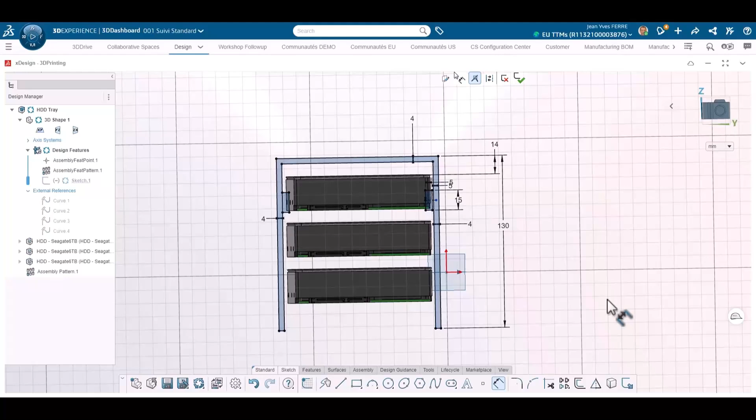In the last episode, we finished the structural parts of the case, and in this episode, we will focus on the most important element of a large storage unit, hard drives. Hard drives need to stay in place securely, but I need to be able to remove them easily in case there is a problem, so I will build a box with drawers for them. Let's start with a layout sketch to represent the size of parts I need in one single location. I don't spend time here creating this sketch. You are familiar with these simple operations now.

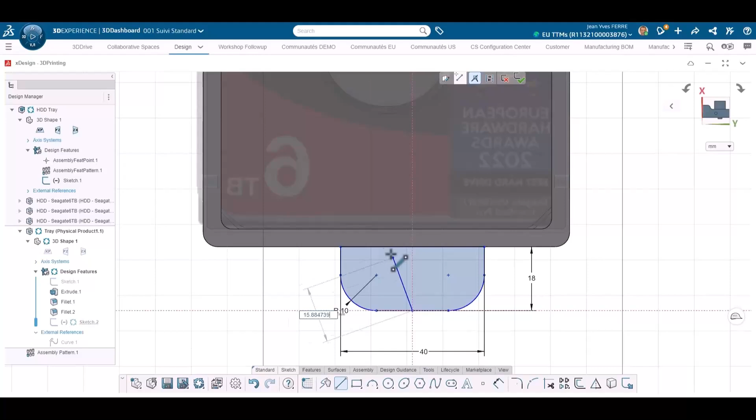So I start with a disk drawer I create with an open contour extrusion, also called a thin extrude. Once dimensions and fillets are placed, I add a small pull tab on the drawer. It will be used to remove hard drives when needed. Again, I add some fillets and dimensions and see how I center the tab. I use a reference line with extremities on the middle of each reference, and force the line vertical to center the sketch. As you may know if you have watched some of my previous videos, I prefer reducing dimension use when I can. Sketch relations are more robust.

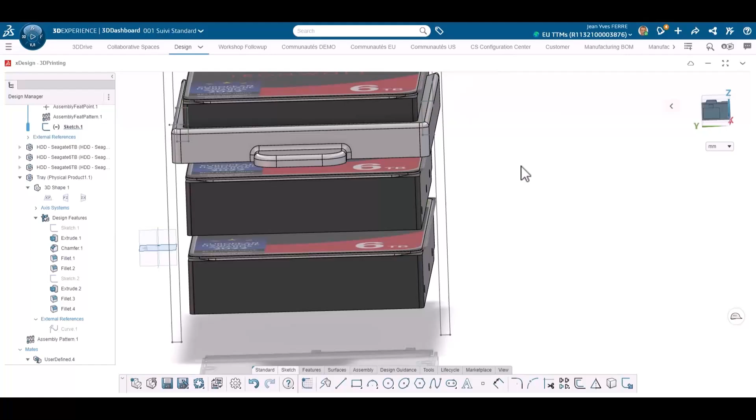I continue with some more fillets and I add some chamfers on extremities to add some flexibility when inserting drawers. I add positioning with a couple of mates. Plane on plane for bottom and side and a dimension for front mate. I need to add a fastening solution between drawer and hard drive. I choose a solution of interlocking studs, and to do that, I project hard drive holes into my sketch and create studs from them.

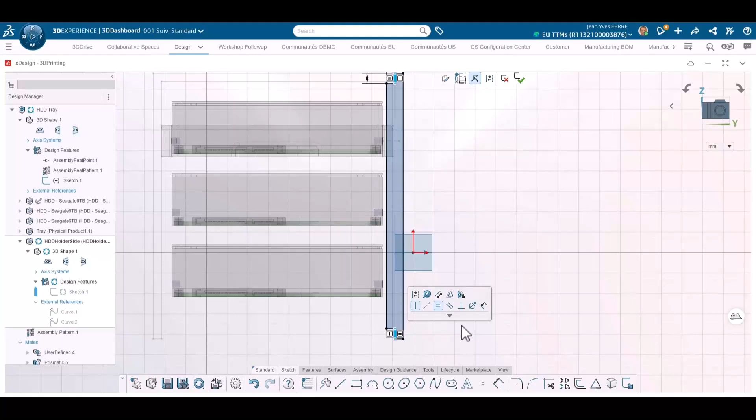Then I create a structure to hold drawers, and for that I leverage the layout sketch I created earlier. I incorporate a lip and groove design to hold the parts together, and I don't forget to add a mate to fix the part. Remember, external references are not enough to position a part. I continue with some cuts where drawers will slide. I choose a clearance of 0.2 millimeters, so drawers will move freely but with a stop at the back.

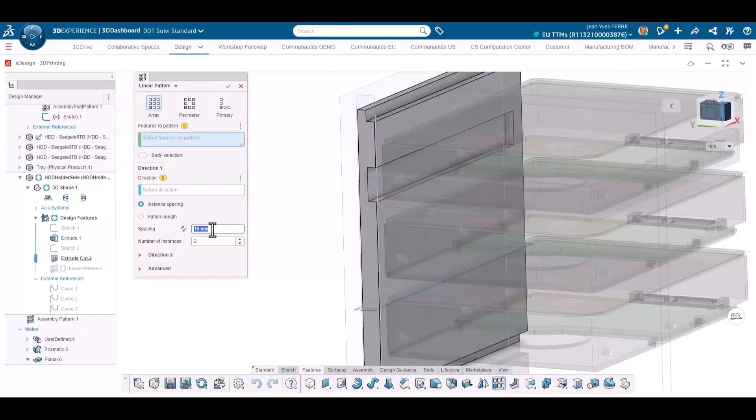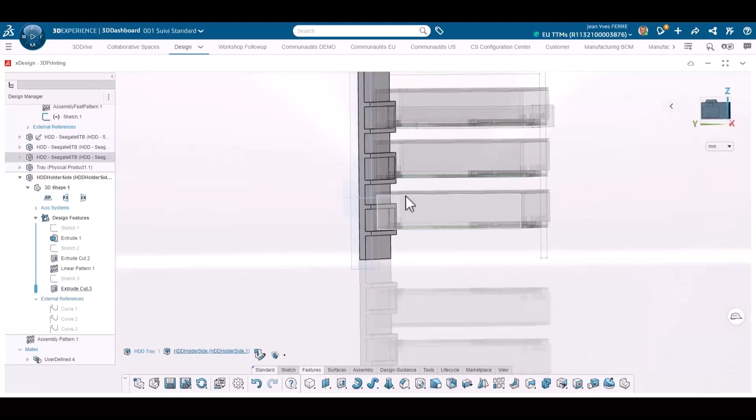Of course, I need this shape for other drawers, so I use a linear pattern with the same spacing as hard drives. At that point, I realize my side part is too thick, and I want hard drives to be cooled by fans, so I remove some more material and make them breathe. For that, I just add some simple sketches and extrude through all. I now add some tabs to secure structural parts together. There will be holes on one side and nut traps on the other side to simplify the assembly phase.

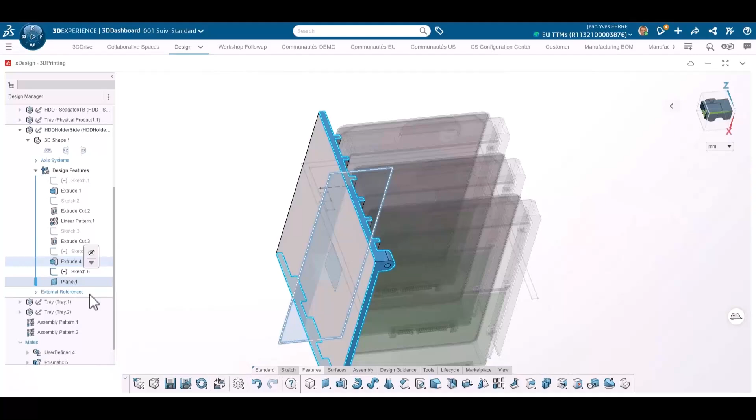Once I have created one tab, I just mirror entities and use the full sketch for extrusion. This saves time. And because I want to save even more time, I mirror both tabs on the other side. Then I would like to add some air vents, so I create some hexagonal holes and I pattern them along a line. To copy them across the part, I pattern this last pattern in two directions, upwards and downwards. I also fill holes that are too close to the tabs so the part remains strong.

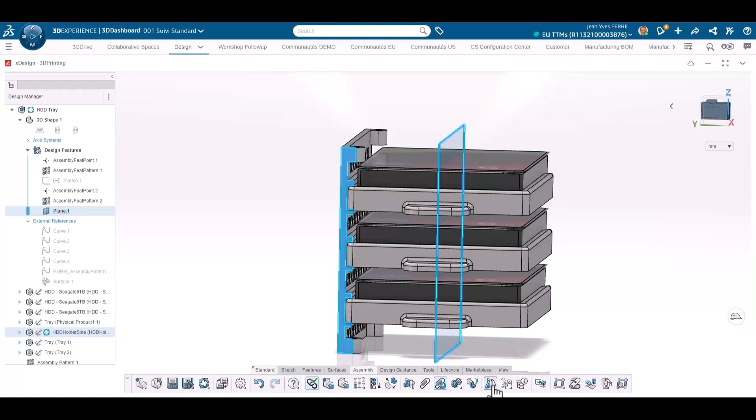Now it's time to mirror the part, very easy with assembly mirror. So I can now create the top part that will hold the side parts. For that I build a plate and project tabs to create some recesses with an offset. That way the parts will fit together.

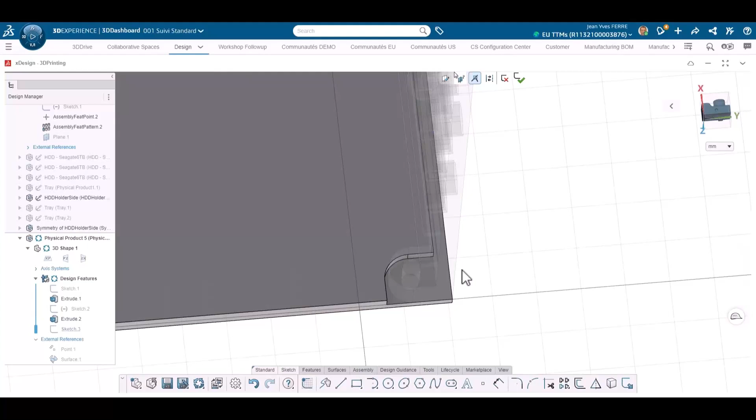Now I create through holes based on the tabs, so I'm sure holes will be aligned. Once I have added chamfers for countersunk bolts, I create an air vent on top part. For that I create new hexagonal holes and I take note of dimensions for the pattern.

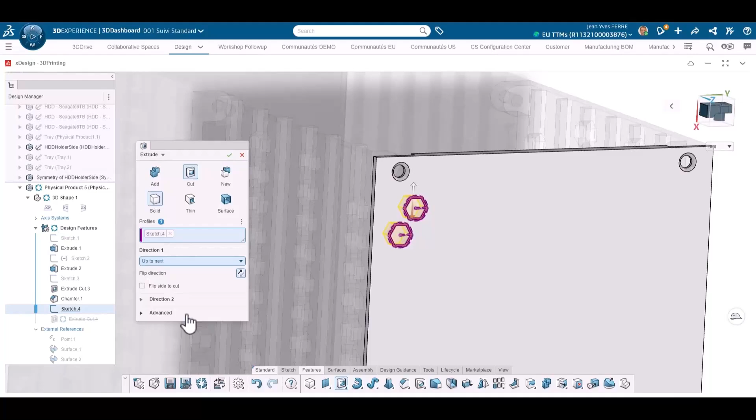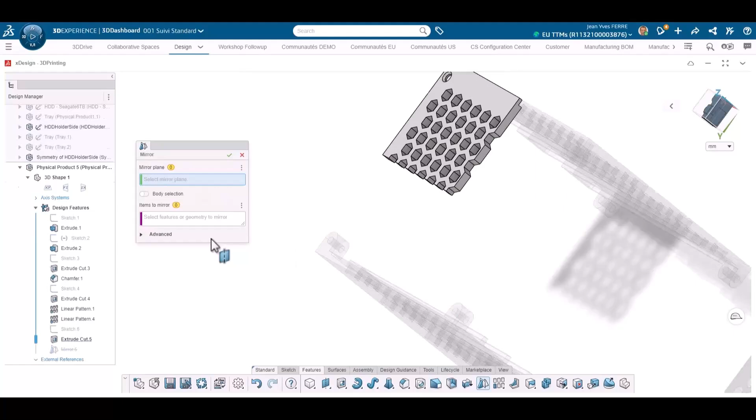Finally, I leverage symmetry of the part in both directions to create the full air vent. That's the reason why I limited the pattern to the quarter of the part. See how I create this pattern of pattern? Then I cut the part by middle planes and recreate the full part with two mirror features. With this solution, these air vents are achieved very easily.

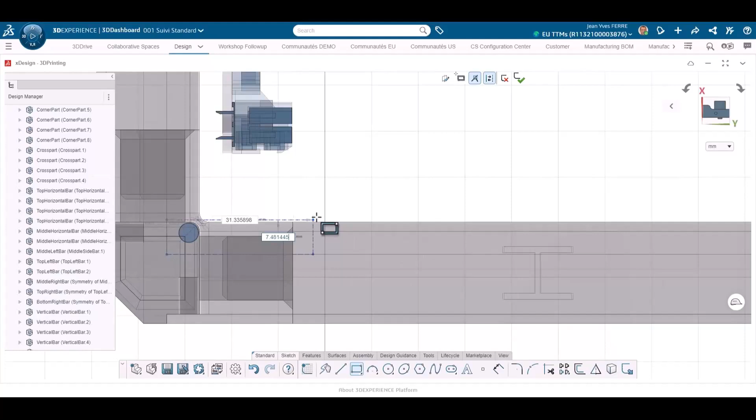Now let's create bottom plates that will support hard drives. I will create a sub-assembly that will contain both bottom plates, so it will behave like only one part in the assembly. I start with hole position, again to make sure holes are aligned, and I create the overall shape based on existing structure.

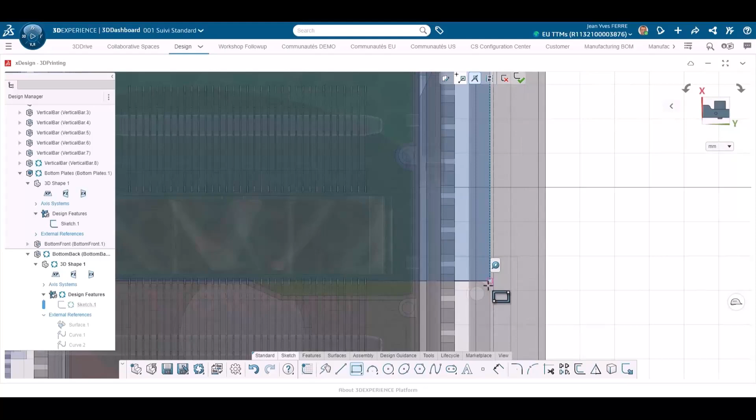Then I create both plates with simple geometry, a box of 2 mm thickness, that's maybe not enough, and of course holes for bolting plates. As always, I add some fillets in the corners, and some chamfers on holes for countersunk bolts.

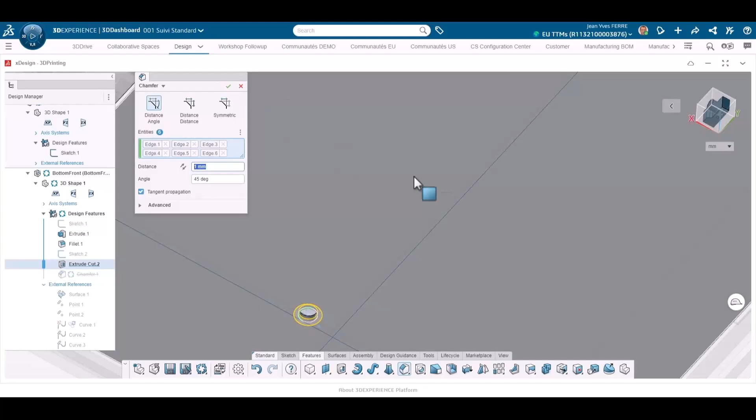I also project holes I will use to attach the drawer structure to the bottom panels. I change feature order so drawer structure holes are done before chamfer. This way I use only one chamfer feature, so only one parameter.

This is when I realize I forgot to design nut pockets in the side parts. So I create a hexagon with a blind hole and leverage symmetry to mirror sketch and reuse the mirror feature I used for tabs. So if there is any change, I will have only a few features to modify and the rest will rebuild nicely.

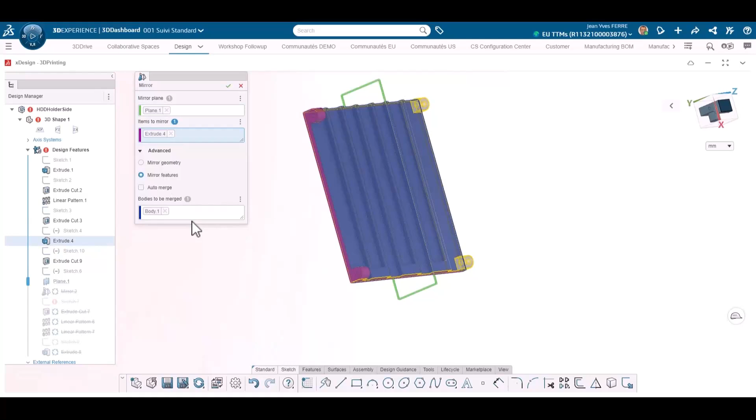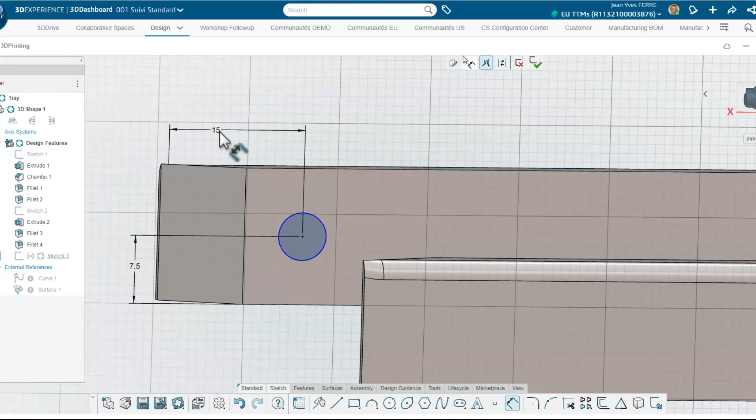However, this reordering has an effect on side vent sketch because part topology has changed, believe me. So I reattach entities to the middle of each edge and errors are gone. At that moment I also realized that interlocking studs will not be robust and accurate enough for my valuable data stored on hard drives. So I decide to replace them with countersunk holes. This will be far stronger and safer. I just make sure I remove dependencies to the rest of the assembly just to have something clean.

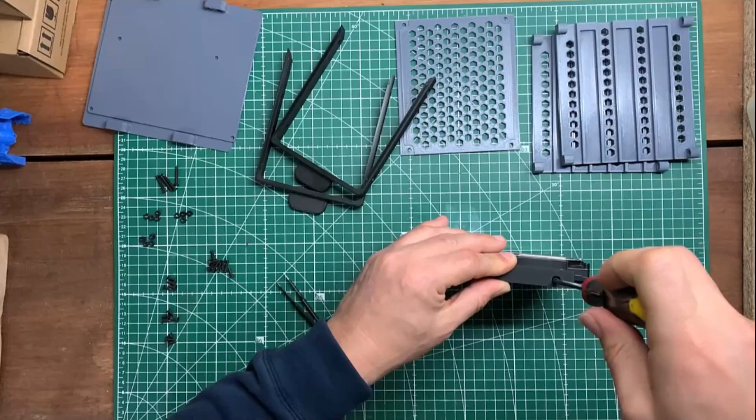Now our drawer structure is ready for prime time, so it's printing time. Once everything is printed, I start assembling with drawers on hard drives, then the structure with nuts in pocket holes. But I assembled side parts wrong, so openings for drawers are not in the same direction. I had only 50% chances after all.

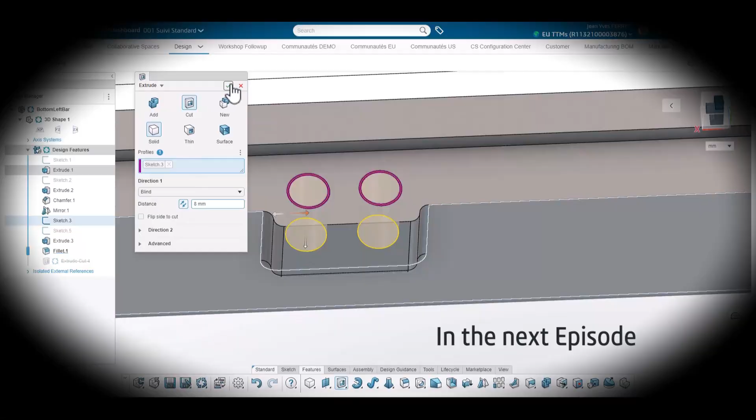Same player, shoot again. Once I change side part, drawers can be inserted, so I can focus on fixing bottom parts. I test the assembly with hard drives in place, finally they can be inserted. However, I already think that design is not strong enough, panel bends too much. I probably need to slightly change the design and that will be the goal of next episode. I will also create some parts to hold motherboard perfectly in place on the structure.